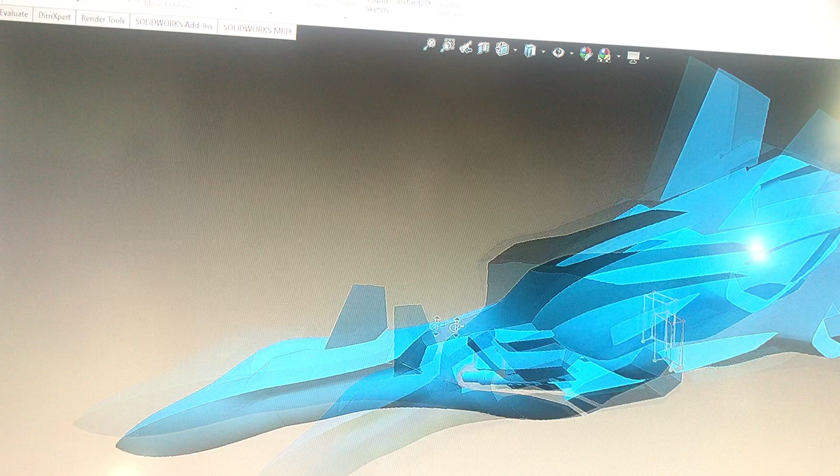Done quite a lot since my last video. I don't know how many days later it is, but I actually made a lot of progress the next day, but just didn't film a video. And anyway, this is the outward appearance of things. Actually, let me show you. I've gotten kind of everything done. A little bit of everything. And now I'm going into super detail.

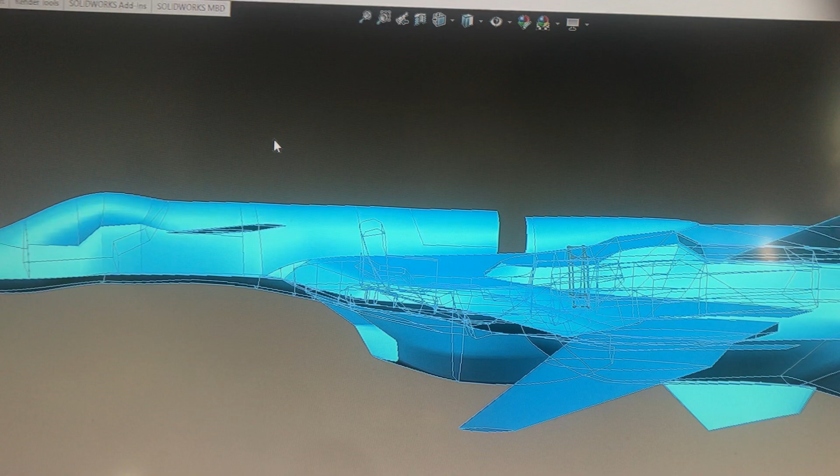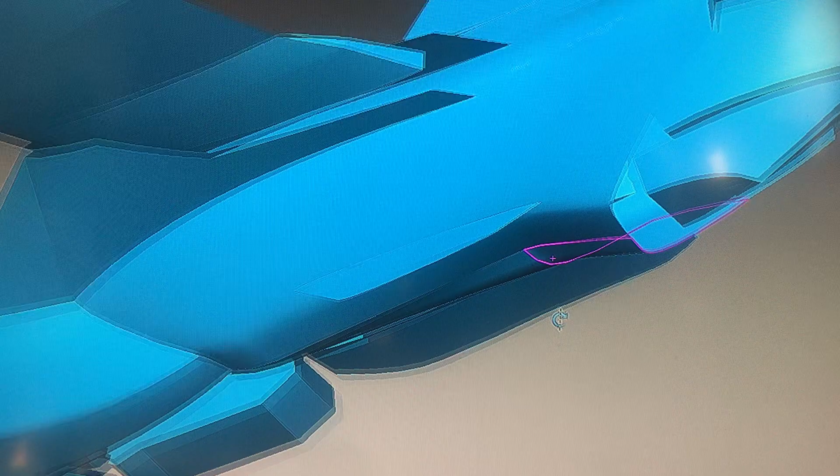Alright, so off the top, let me hide this sketch because I just added that. We've got the wings, we've got the vertical stabilizers, we got the canards, we got the, I forget what these are even called. I went back in and redid the legs. I made an adjustment. I took back what I said. I finally did constrain the sketch with a particular sketch that was different than what I was trying in the first place, and that was able to give me just this right crease here.

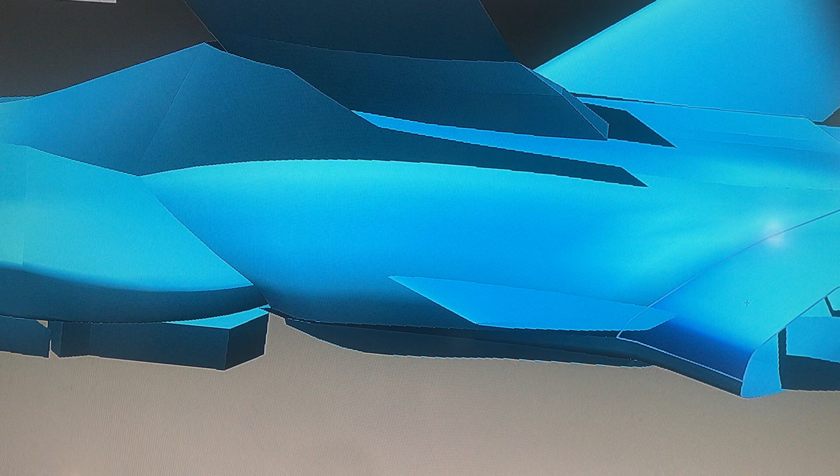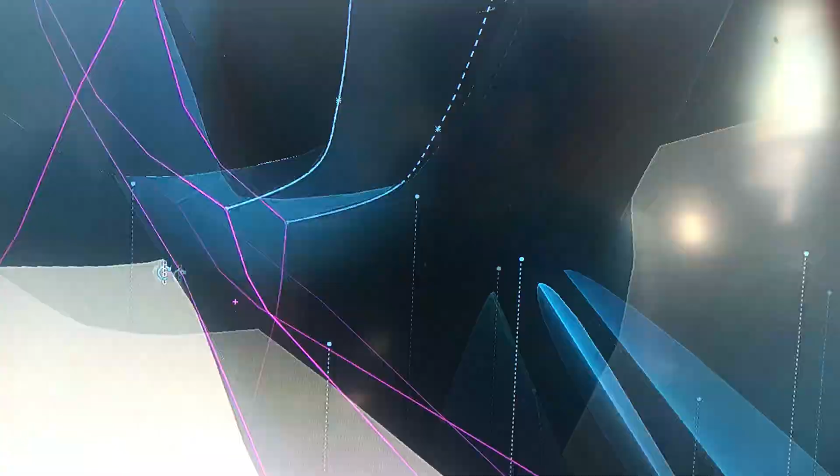And yeah, let me see if I can show you this guy. So I just added this sketch that you can kind of see to constrain to that, and then I cut everything off, and that let me get this little crease here. So now it looks more like what they're trying to do. But then I have other little weird artifacts because that doesn't blend so well. Yeah, it needs to be tangent to two sides, but I don't know. Maybe I can do that. Anyway,

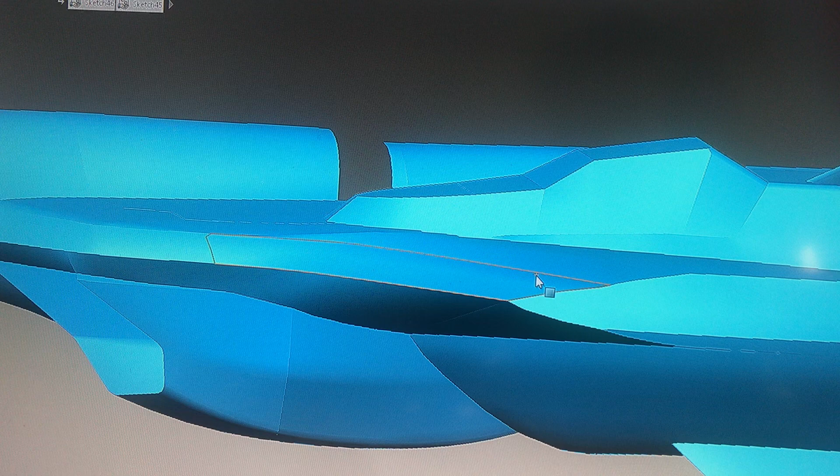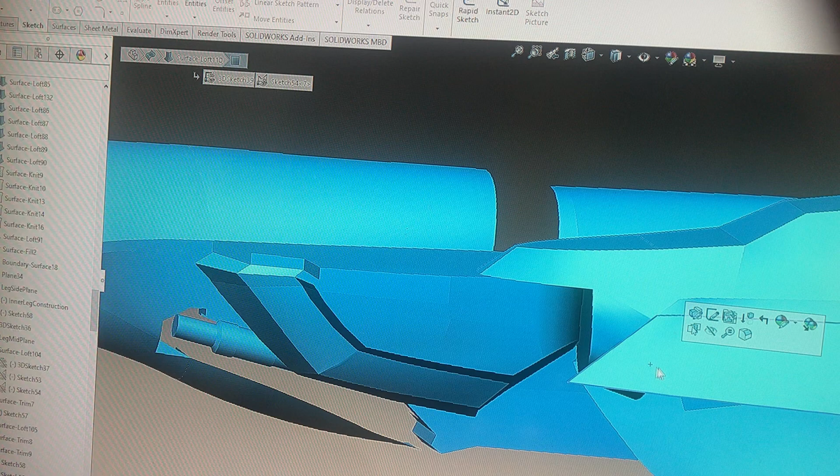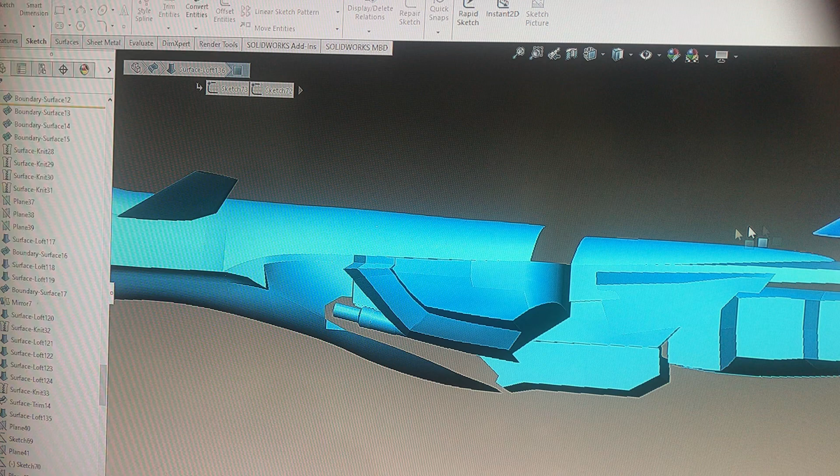also I went ahead, started working on the innards. Let me bring out the wing and stuff. Hiding this stuff so we can get to the inner chest area when it's in its robotic form. This took a while, but it was all just simple geometry stuff, you know, just finding the right things to be parallel with what things, and then accounting for weird angles. Anyway, hide this. Just want to give you a good view. I don't want to have enough in it to have context. Some of this stuff's just going to seem like noise. We'll get the shield out of the way. And what else do we have to get out of the way?

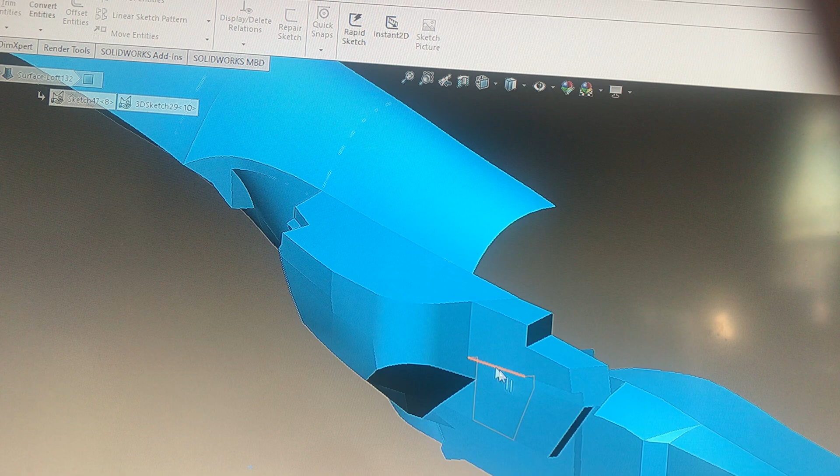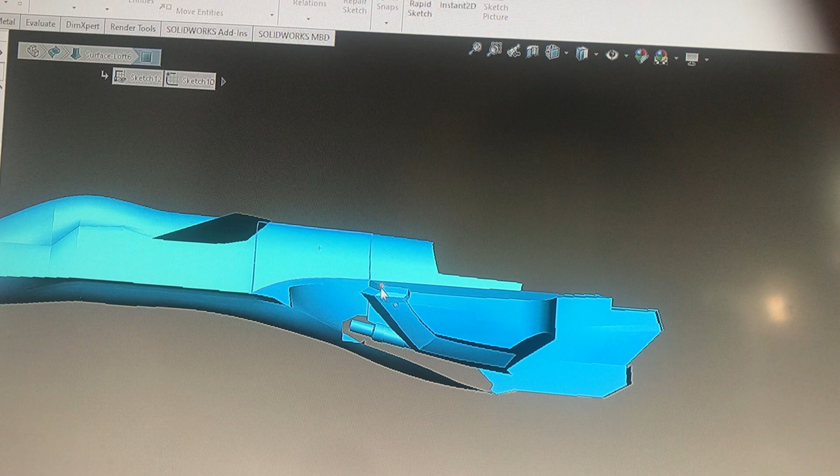What's this in the way? Oh, part of the arm. Some things I have to trim back because I have minor collisions, but I saw in one of the videos or pictures I have that they have this contoured anyway, so I think they ran into the same issue. And instead of trying to model in this close proximity to the other piece, we just build it out and then, you know, do a combine on them or something. So let me hide this too, because this is a part. And if I hide this, we could really start to see. Geez, got a lot of pieces I need to stitch together.

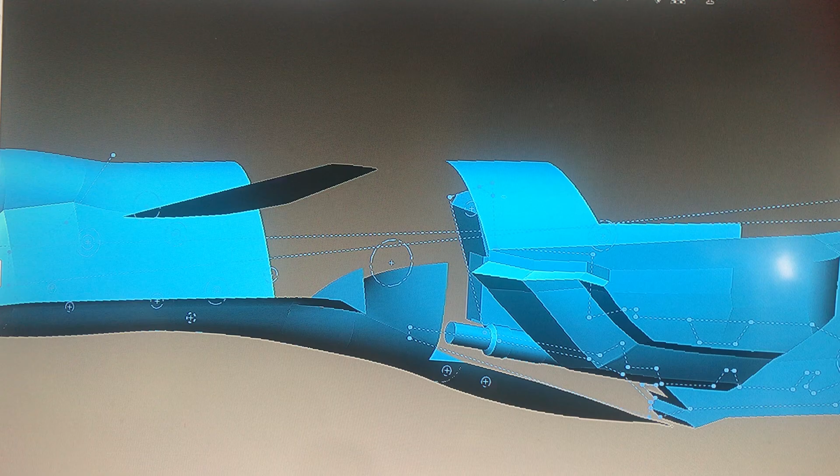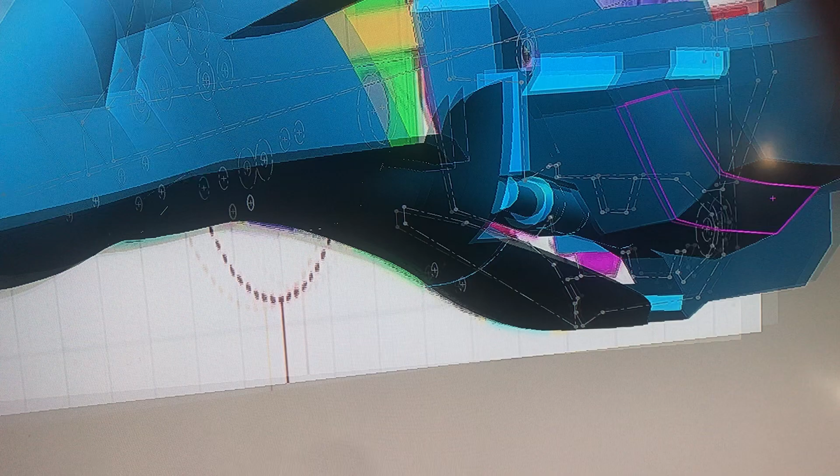This would be the chest piece. Alright, the head would be out here. If I put on the side profile x-ray, kind of get some context. Right, that's how that's going to be. It pops up and swivels around. And then we have our cannon here, which I still have to make a cutout. This all has to cut away. And then there's a cavity here that this is supposed to recess into. I'm not sure how that's supposed to work yet. I have an idea that this front piece will be a cutout that can slide to the back at this particular angle so that it's going back and out at the same time, and that should pull this back and out so that it can fit in here.

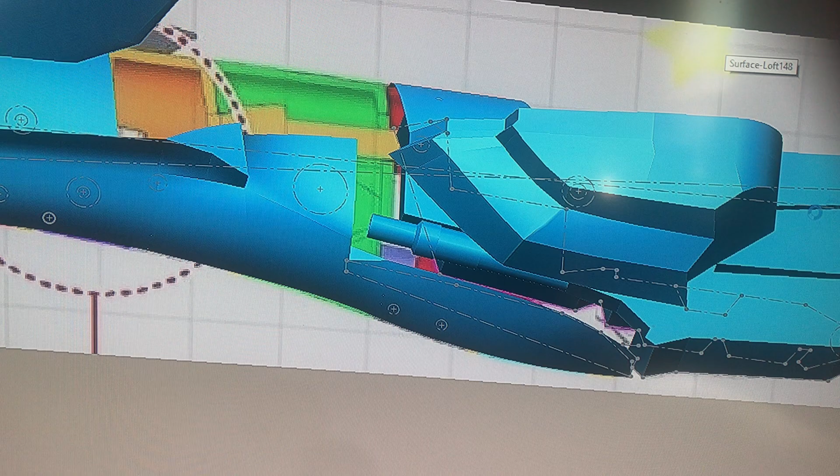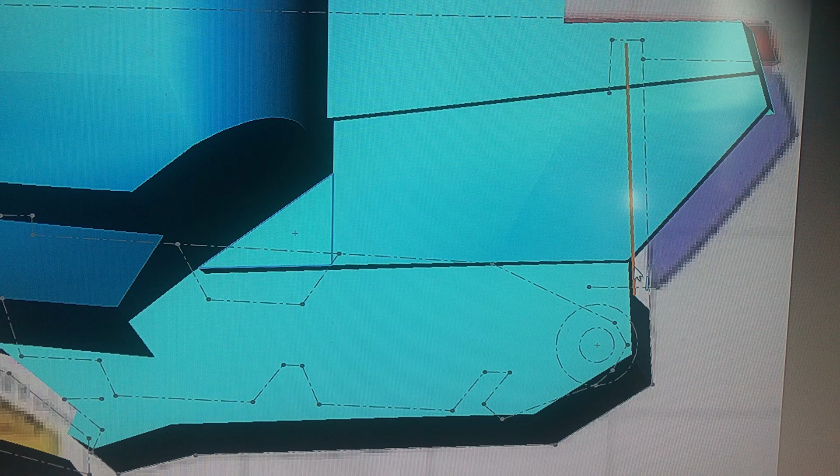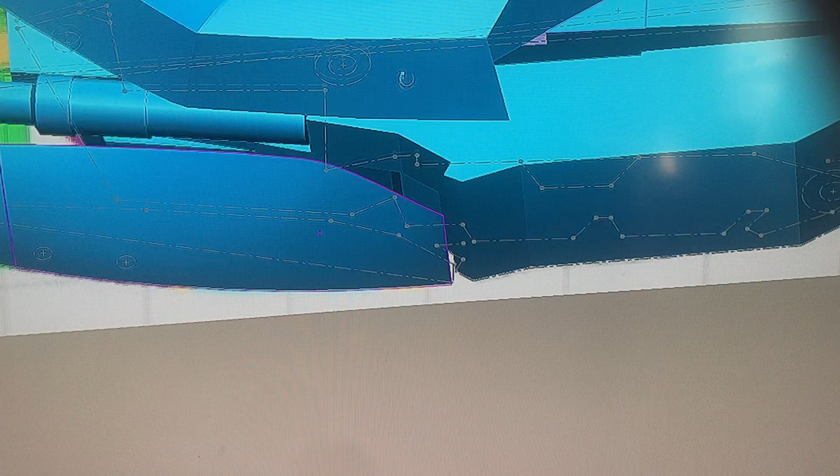There's one little section I need to correct with regard to this piece. This is actually supposed to extend down more. This is separated as it's supposed to be because this is some flip up piece or something that leaves a cavity. So they're separate pieces. But starting here, this guy needs an angle that comes down and then goes back up there. So I kind of have to add a triangle. We'll just redo the sides on that part. The rest of it I haven't filled in. But then I started working on the back region, and I went ahead and added curves to what I had before. These were just straight lines in previous videos. Now it's got some curvature to it. It kind of lines up with the curvature of this. Just slight curve, right?

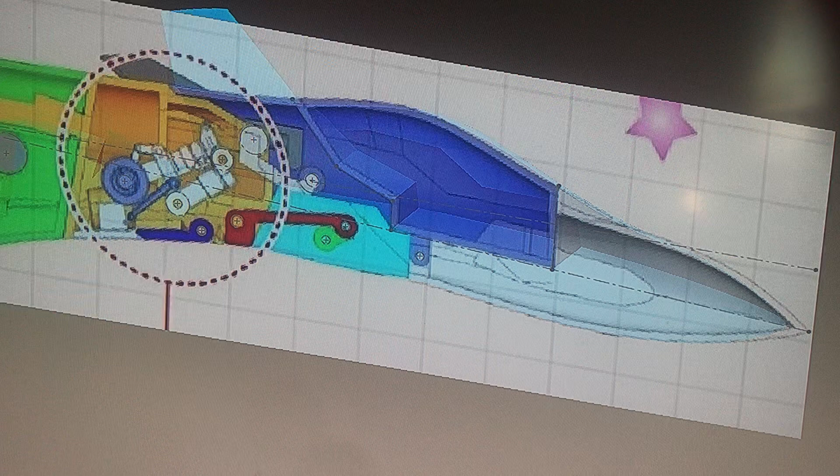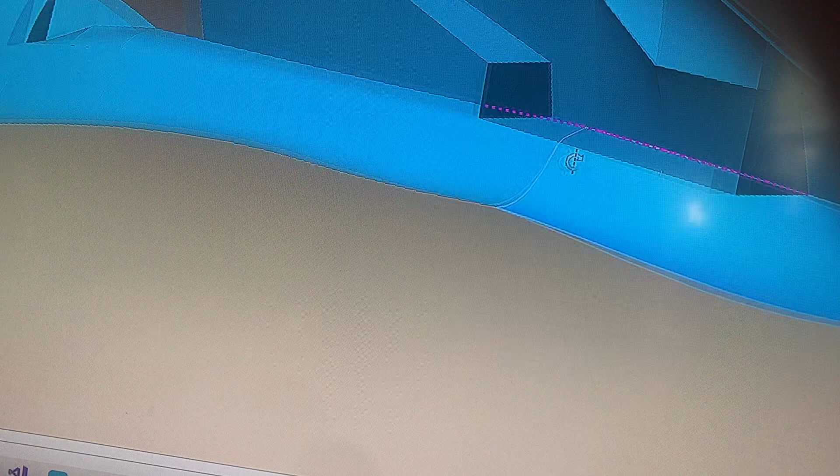And then I did some other stuff to work on the body area here so I can get this leg thing going. And then on the inside, I just started putting in some surfaces that would represent the cockpit area. I'm not finishing it out yet because I'm not sure if I want to go with this method, because I don't know if I should go with an inside line or the outside line and try and thicken to the right dimension or what. But I want to see what it looked like, see what might be easier to do if I do it this way.

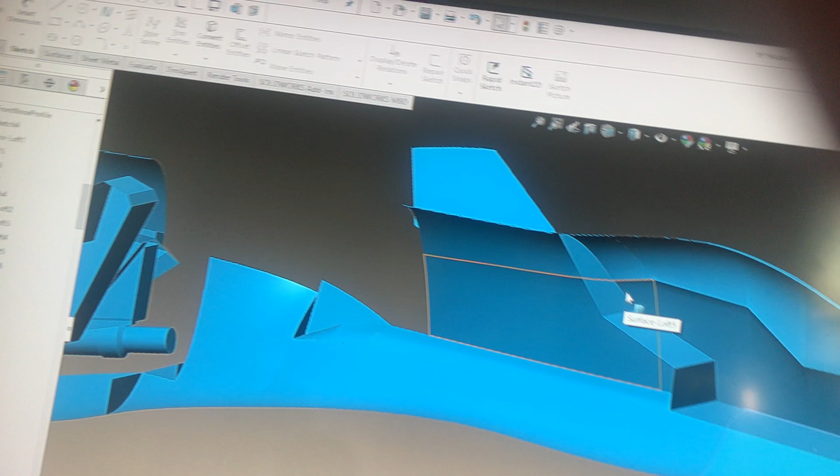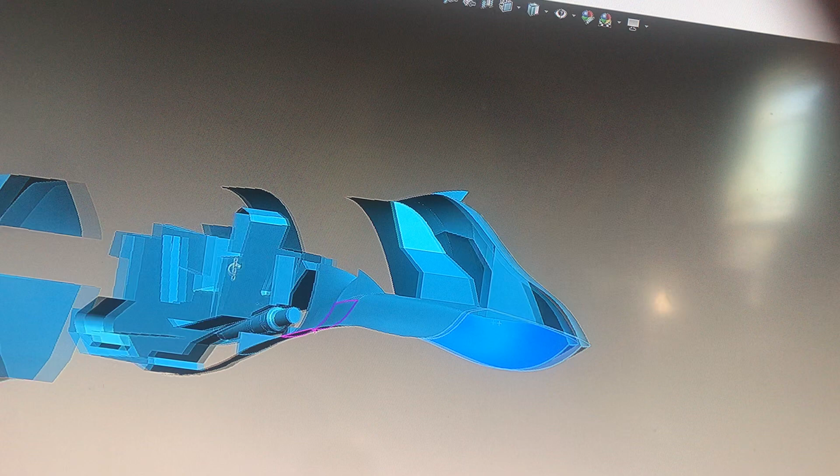Because once I thicken it, certain edges form if they're separate pieces, and then sometimes you can't cut along the edges that they form perfectly because certain parts of those edges won't be perpendicular or horizontal correctly, and it'll leave weird artifacts that don't work well. Sometimes the thing won't even form, right? It'll give you invalid geometry stuff. So you have to be as clean as possible. And this might be the way to do it, because I've extended this surface and then cut it or trimmed it against the body, so it's perfectly against the body. I don't have to worry about anything if I stitch this together and then thicken it, because it was all part of one thing.

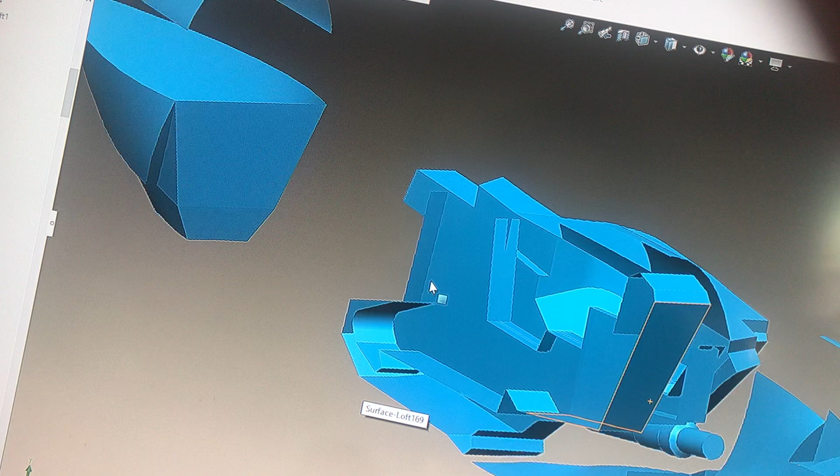Anyway, that's kind of it for now. I'm going to be working on the inside. This was a major thing I worked on last. This is going to be basically the back. And of course I'm forming it in the transformed mode because it's the only thing I have good pictures of that will be consistent in dimensions, right? Once it's transformed and it's in different poses, you can't tell how big something is relative to another or any of that. But with these side images and the top images, I know everything has to fit within this.

Oh, great. Thanks, dog. You ruined the video. Now you added some life to it.